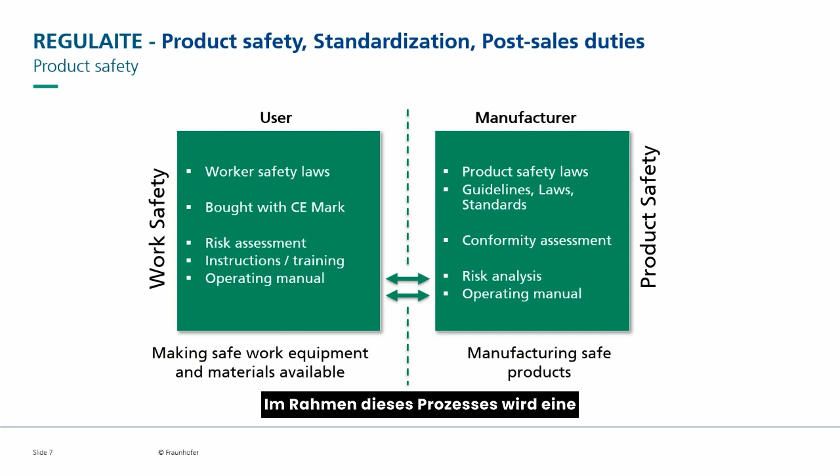Okay. Now when we talk about product safety, we again have the user perspective and the manufacturing perspective. So the manufacturer wants to make sure that their products are safe. So what they have to do is they have to consider different product safety laws, guidelines, and also standards. And they go through this process called a conformity assessment. And as a part of that, they do a risk analysis and they write an operating manual. And in this manual, they are telling the user how they should use it, what they should watch out for, and what some of the possible hazards are.

If you're looking at it from the user side, of course, you need to consider your worker safety laws. You need to make sure that anything that you're buying has the CE mark already affixed to it. So that's really important. If you buy something that doesn't have the CE mark and you use it, that's your problem, that's your liability. And that's something that not everybody knows.

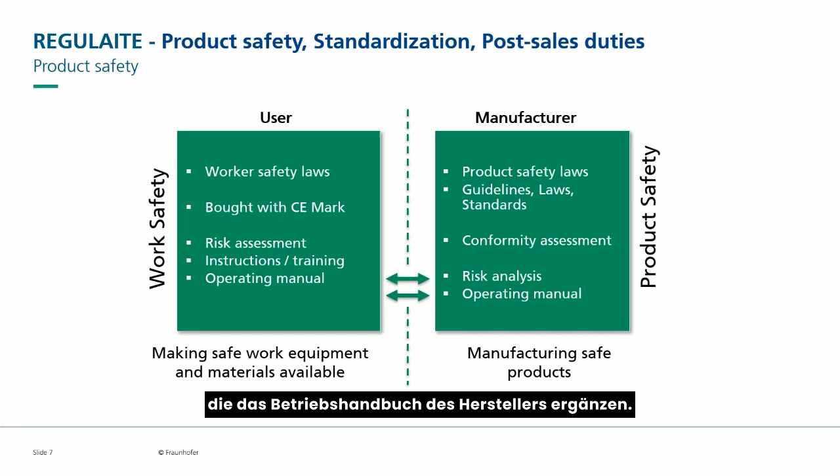So even though the manufacturer has already done their risk analysis, as the user, you're also going to do your own risk assessment because the manufacturer, of course, doesn't know all the details of your application and what's happening in your factory where you're using it. And that's for you as the user, as the manager, to make sure that you're doing this. And as a part of that, what you also do is provide instructions and training materials that go in addition to the operating manual from the manufacturer to your employees. And the idea is that you're making this equipment as safe as possible for your employees. Okay, really important to understand the distinctions there.

When we talk about what are the typical sources of product safety issues, most people consider the top two, which are construction or development errors, meaning that you made some kind of a wrong assumption, you made a bad calculation, you didn't put in some kind of a safeguard in order to cut costs or things like that. And what you can also often consider is a manufacturing defect, like you have some kind of material defect, things that are typically covered in a warranty or in a guarantee.

But in addition to that, what often happens as well is we have faulty instructions. So what you have in the user manual is incomplete, warnings are missing, and what's also an issue is exaggerated advertising promises. And as a final source of error, there's the idea of product monitoring errors. So again, as a manufacturer, it's important for you to actively see how your product is being used on the market. And if something happens, if users are getting injured because of it, you need to either act by yourself or you can wait until somebody within the EU will also contact you and tell you you need to take specific actions to remedy any kinds of things. And the idea here is this is what we all know as like a product recall. And that happens, I think, more often than we really know.

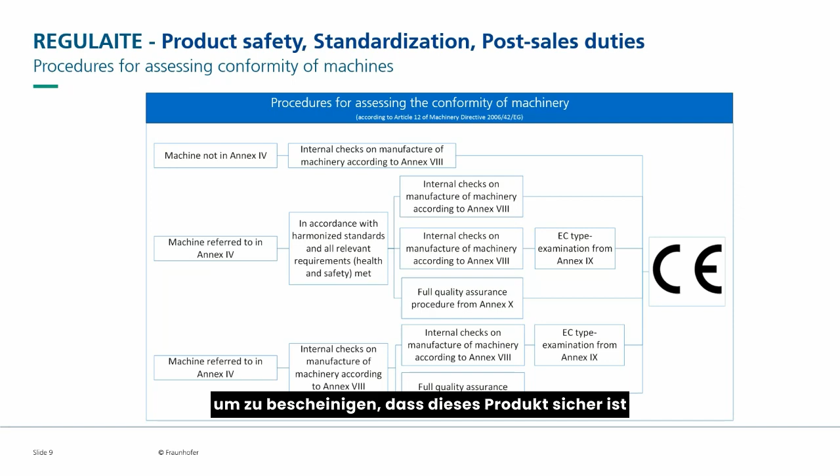So right now, according to Annex 4, robots are things you can do in a self-conformity process. You do not need to go to a notified body, you do not need to pay somebody like TÜV to ensure your robotics application is safe. Of course, you're still allowed to, and if you don't want to take on that responsibility, that's possible for you, but it's not required by the machinery directive.

Okay, so if we take a look now towards the new machinery regulation, it's been a little bit streamlined. Here we have different annexes, and on top, any product not listed in Annex 1 you can do by yourself, what they now call an internal production control, and you can put the CE mark on your product by yourself.

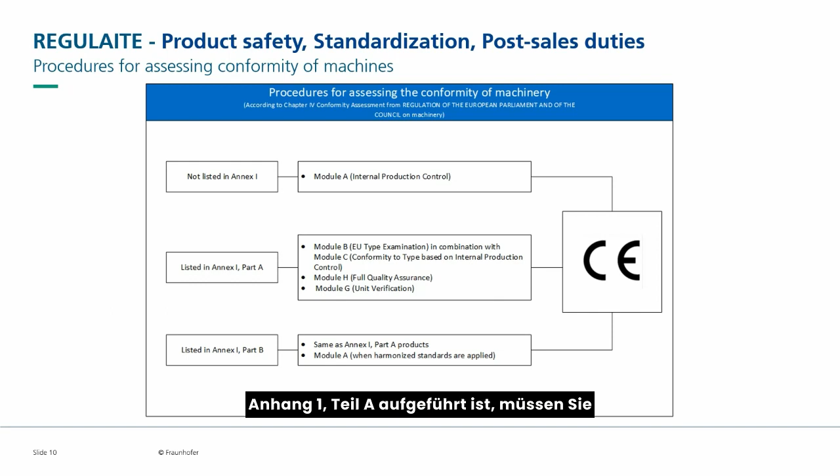However, if you have a product listed in Annex 1 Part A, then you need to go do some other kinds of examinations, known as Module B, an EU type examination where a notified body checks it, or some other kinds of quality assurance mechanisms.

So if we dig deeper into Annex 1 Part A, what we see is there are certain things really closely tied with robotics and with AI. For example, if I have safety components with fully or partially self-evolving behavior that use machine learning approaches, this is something I am not allowed to test myself.

So that's a lot of this idea that I have some kind of AI system that is evolving, that is getting new data, and I'm using that to implement some kind of safety function, like if you see somebody gets closer, stop. I can train this beforehand using AI methods, and say this is a model that's been trained and isn't changing anymore, with no self-evolving behavior over time once it's out on the market. Then it's not part of Annex 1 Part A.

But if I do have that, then it's something I'm not going to be able to put the declaration of conformity on by myself as a manufacturer.

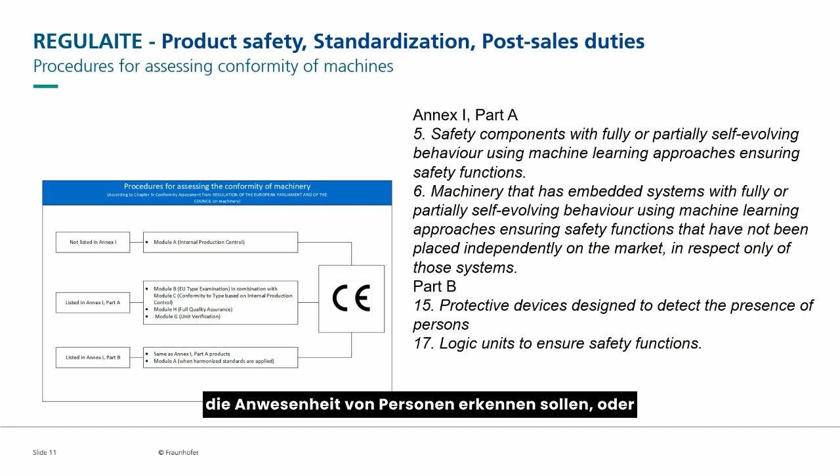Okay, so continuing, we also have machinery with embedded systems with fully or partially self-evolving behavior. And then also if I have protective devices designed to detect the presence of persons, or logic units ensuring safety functions, those are also things I'm not allowed, according to this, to test myself.

So an example is I have a camera system that is a designated safety camera system that uses AI to detect people. These kinds of protective devices are something I'm going to have to get outside expertise and help with to validate before I can put the CE mark on this product.

So again, looking at the issue of product safety, what's often interesting and important is the idea of safeguarding measures. We have what's known as a hierarchy of safeguarding measures that we take, both from the manufacturing perspective and later on down the stream as an end user.

So the idea with the hierarchy of measures is, as a manufacturer and as an end user, I want to start at the top, and only if I'm not able to ensure safety based upon the top level, do I then go down one step lower.

So of course, it's better to have an inherently safe construction. As an example, I have a robot that is limited by its motors, its gearing, its inertia, that even if it were to go at maximum speed and come in contact with me, those contacts would be below the biomechanical thresholds allowed for that specific body part. So no matter what happens, no matter how I control it, it can't hurt you. That's the idea of inherently safe construction.

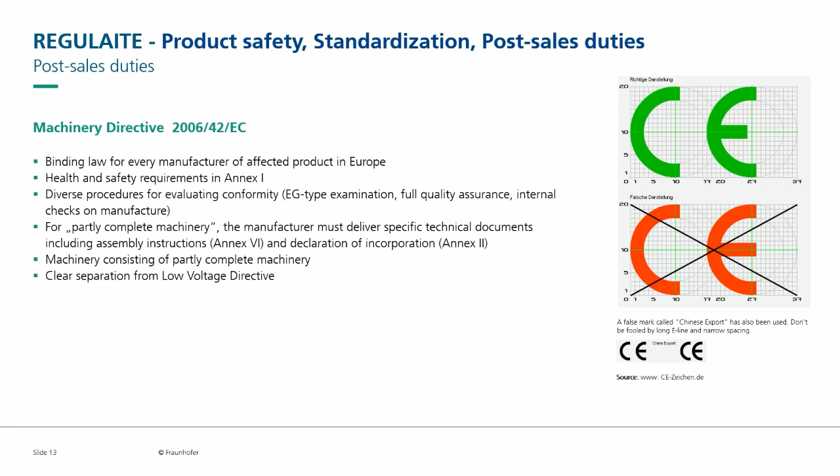Okay, so moving along, what we'd like to talk about now is the risk assessment process as part of the product safety approach. And what does this look like, and what do I have to do? And to give you some tips and some tricks and some ideas about how this process looks.

So as we've already said, the main legislation regarding product safety in Europe is the Machinery Directive, soon to be the Machinery Regulation. We also have the Product Safety Directive. So the question is, how do I really define and how do I know when a product can be considered safe? And this is a really tough question because how do I know the different things that can happen and how do I plan for that?

And the answer is, it's considered safe when the risk assessment and the risk analysis shows that the residual risks that arise from using a specific product in the different ways that the manufacturer or the end user thinks they will be used are as low as possible.

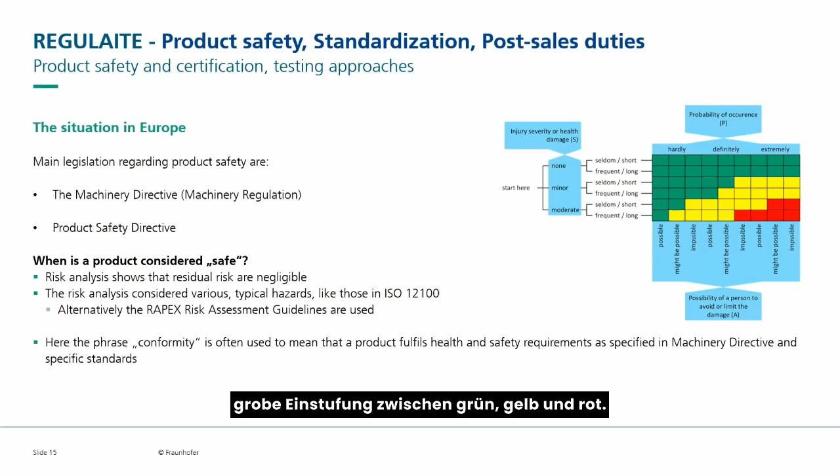We also have what's known as the RAPEX Risk Assessment Guidelines. These are online from the European Commission, and these are something that you can use to guide you through the risk assessment process. We'll jump to the idea of standards.

What is a standard? Are they mandatory? What are the different types of standards that are available that I can use? And what's the difference between a law and a standard?

So here we have a standard, and a standard is all of these things. It's typically an industrial standard, typically made, written by a group of people from the same industry who are focused on a certain application or a certain object, a certain tool. These standards are, of course, up to date, so they have to be updated in a regular interval, at least I think 10 years, and sometimes even more, often within like 5 years. Standards are very specific to an area of use.

As an example, for robotics, there are different standards for robotics being used in healthcare than robotics being used in industrial applications, and also different from robotics being used in consumer applications. Because of this area of use, it becomes very tricky, especially for something like a robotic system where the same hardware can be used for a different application.

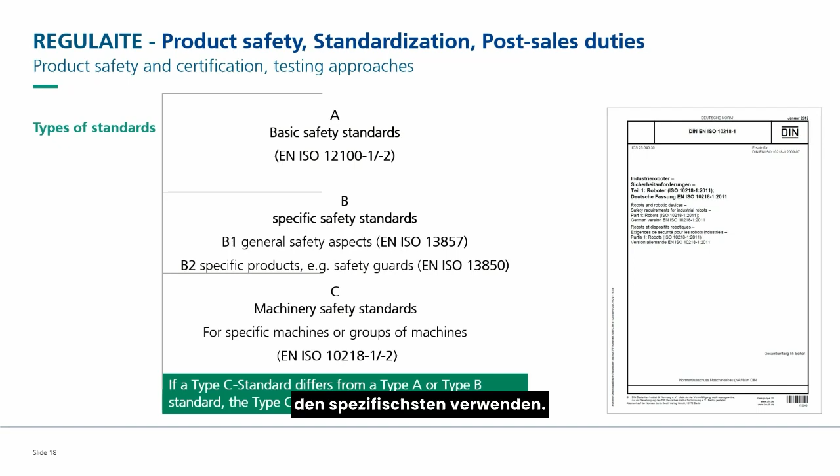We have three different types of standards. They're called A, B, and C. They go from high level, mid-level, and very specific. And when we're talking about standards for a specific application, you're going to want to use the most specific one. So if there's any kind of discrepancies between, for example, a type A and a type C, what's in the type C is the one that is most relevant for your application and has priority.

So I've already talked about this, but I'll say it again. If I use a standard, does it put me on equal footing with the law? No. But if you use a harmonized standard, the burden of proof is on the authorities in case something happens. So it's a pretty good idea to want to use those. Are standards mandatory? No, again, burden of proof. And the final one: what types of standards are there? A, B, and C, where they are very high level and become more specific. If in doubt, use type C standards.

We ask ourselves, how can we reduce the risk by applying this hierarchy of measures? We document that, and then we ask again, after I've done that, are there still any more residual risks? And you keep going through this iterative process, documenting all the things that you've changed in your design.

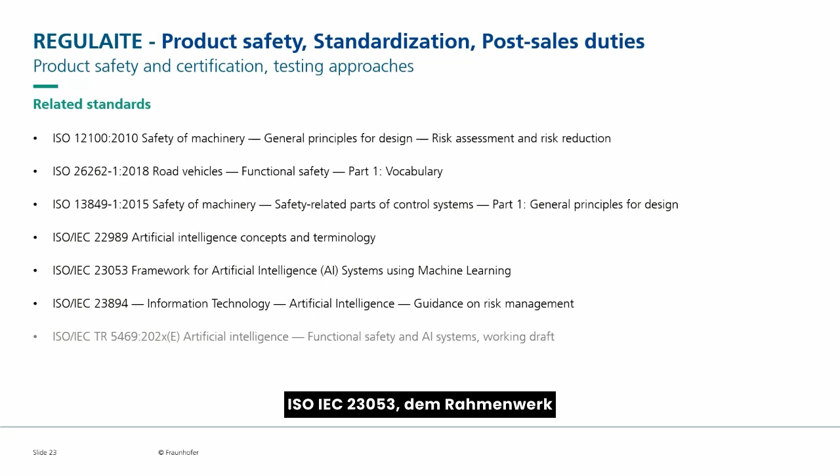So moving on, we also have the ISO IEC 23053, which is the framework for artificial intelligence systems using machine learning. And then we have some other ones that are being developed right now, looking, for example, at guidance on the risk management for AI and looking at functional safety in AI systems.

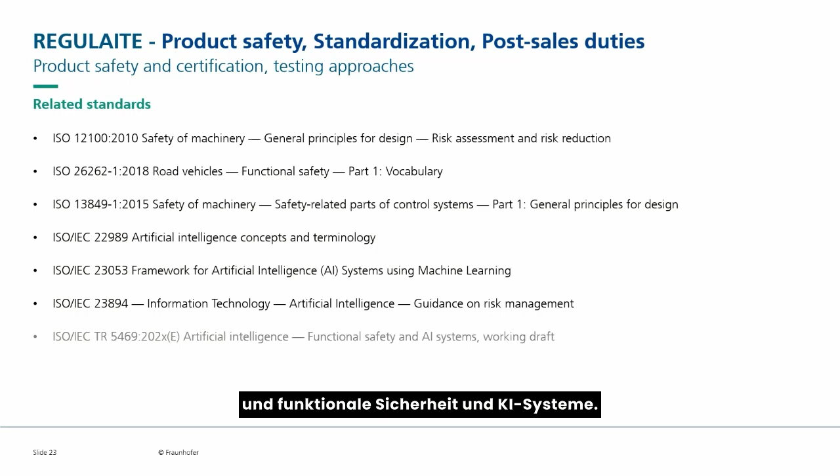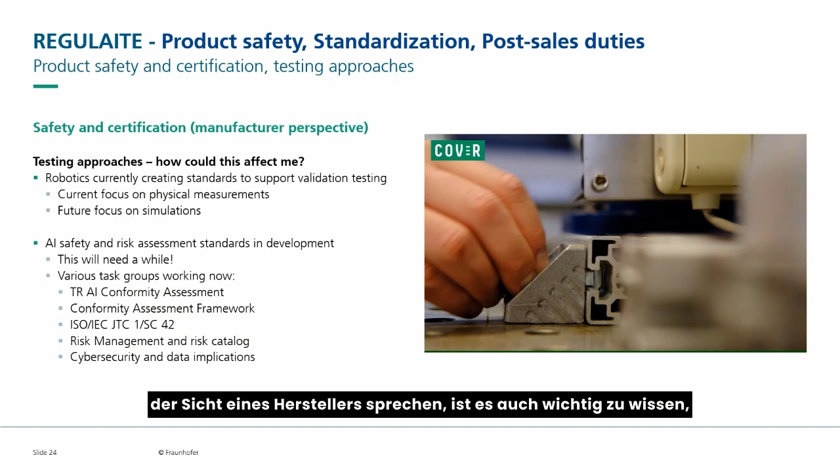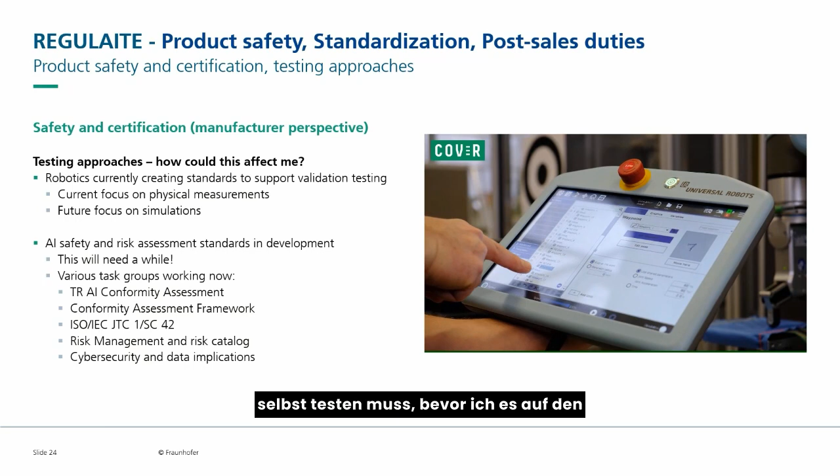Okay, so moving on. When we talk about safety and certification from a manufacturer perspective, it's also important to know that it's part of the CE process, and what's also defined in some of the relevant robotic standards is that I need to do some own testing of my robotic system before I put it on the market.

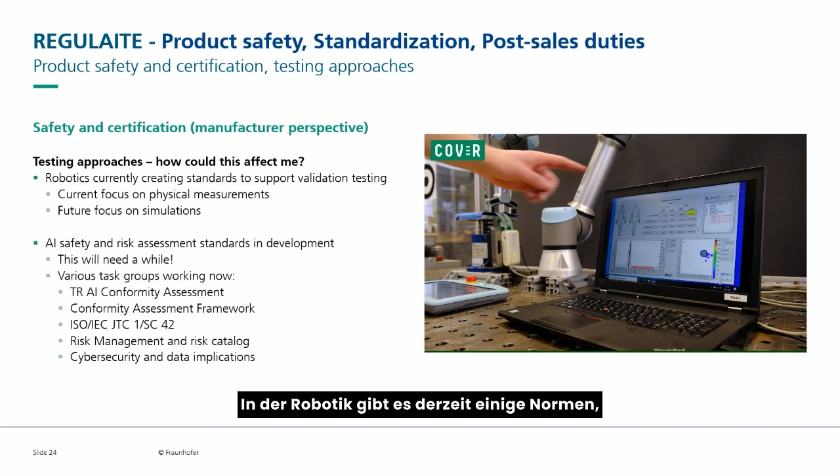If it's used for collaborative applications. And so right now in robotics, there are some standards that are supporting me to guide me through this validation testing, as is what we're seeing in the video. It's how I can measure the forces and the pressures.

The future focus of these standards will be towards simulation, being able to do this through some kind of formal verification, without having to conduct a physical measurement, which from a manufacturer perspective is very time consuming. It's also not really in line with the idea of a flexible robotic system.

Right now, if I have a robot that is power and force limited and could come in contact with a person, I'll need to do force measurements like you saw in the video. And if I change the program in a significant way, I'll need to redo these measurements. That's far from the idea of flexible robotics that change and decide how they work in changing environments. If we have to stop everything and do a new pressure and force measurement in between, that's not really how I think robotics of the future will look.

So that explains this idea within the standardization community, also being pushed by manufacturers, integrators, and end users of robotics: that this is simplified so it can happen online in a computer, in a simulation.

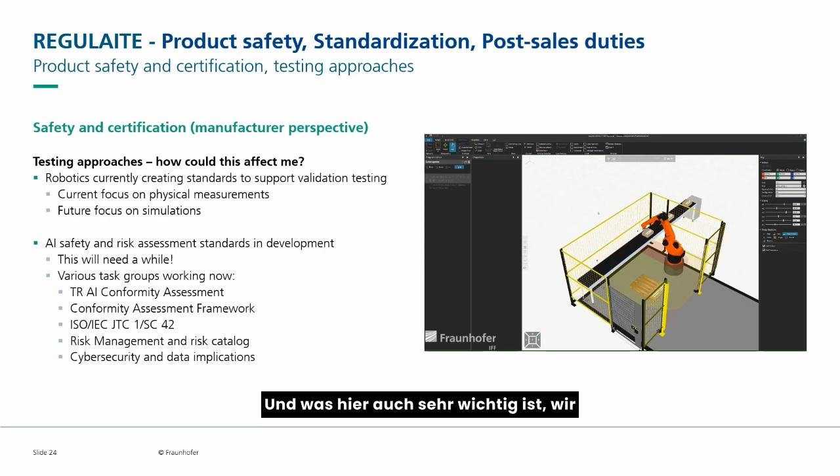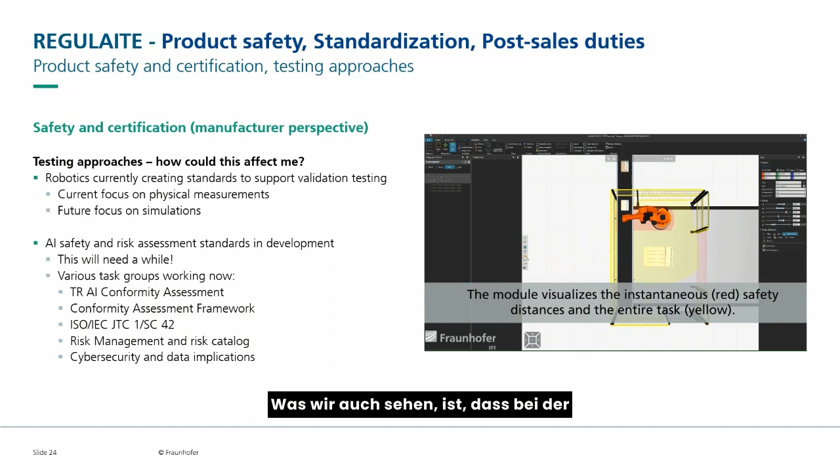What's also really important to realize, here we see in the video an example of how these kinds of safety assessments online could look. What we also see is, in terms of robotics with AI and functional safety, there's also going to be some kind of testing involved.

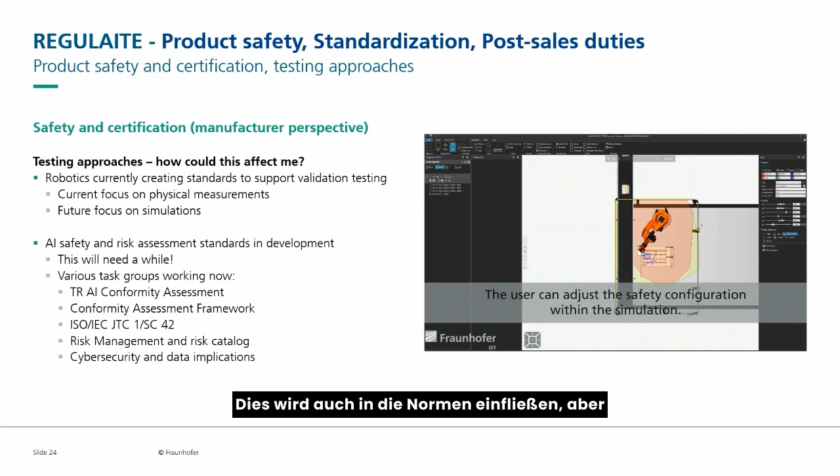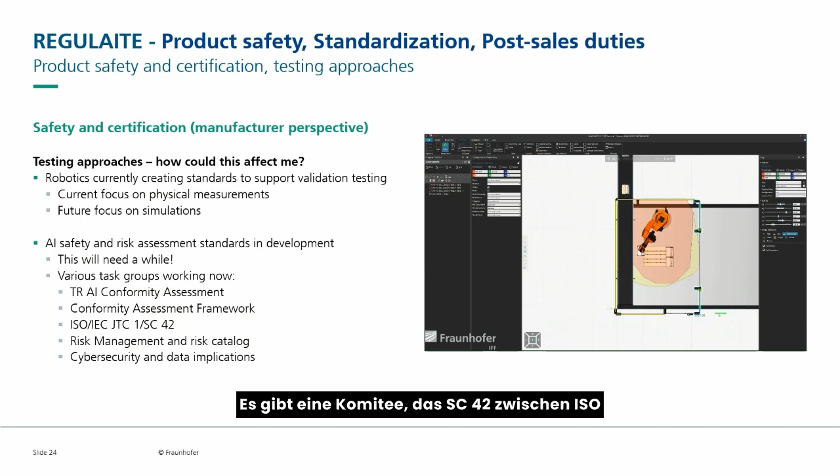This will also be in the standards, but this is going to take a while. The standards communities are working on this right now. We have the joint committee, the SC42, between ISO and IEC, and they're looking at all kinds of different things regarding AI, and this is part of it.

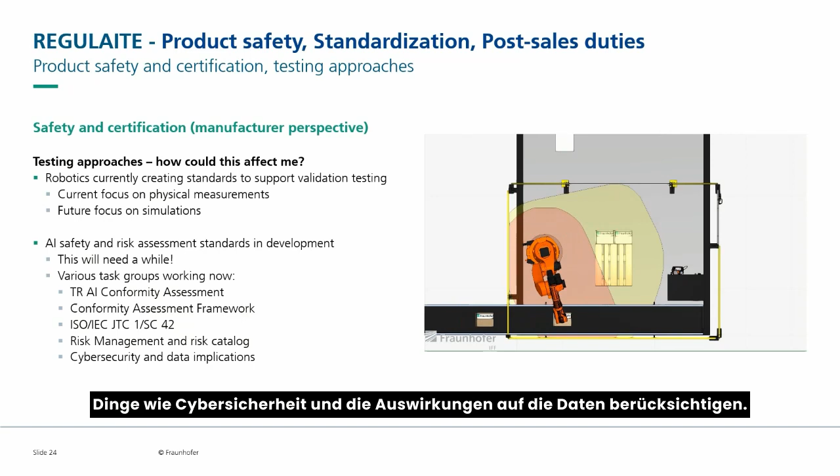Of course, what we also have to consider are things like cybersecurity and these data implications. It's going to be a long path before we have these standards in place, unfortunately.

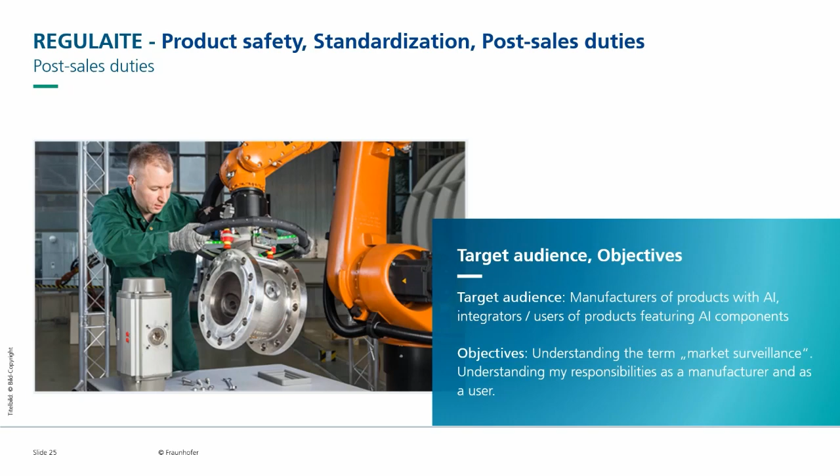Now we're going to look at post-sales duties. As a manufacturer, if you do the CE mark, you need to complete technical documentation, and you need to keep copies of this available, and also keep copies for the different versions of the product you put out on the market from year to year.

As an end user, it's really important you have brochures, descriptions, and data sheets. It's also important and required that you have maintenance plans if the product requires some kind of maintenance. We have product documentation, and this is really important: things like electrical plans, circuit drawings, layouts, and any static calculations involving forces that could be critical.

What's also important is you have the user manual. It has to be in the official language of the country it's being used in. We're all familiar with the thick user manual with 20 different languages. In the new version of the machinery regulation, it's okay for these to be available online, so the idea is we'll reduce the amount of paper being sent around.

What's important is that you keep a copy of the conformity assessment, which basically states which standards you adhere to, the name of the product, when it was put on the market, the address of the manufacturer, and the signature of the person responsible.

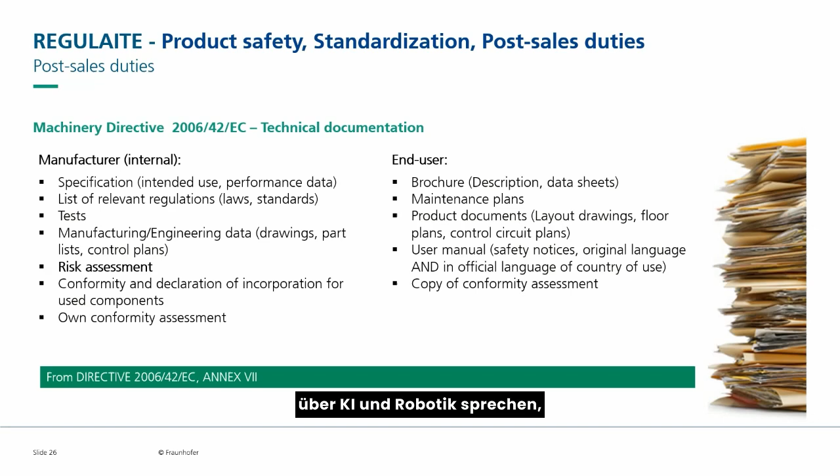Okay, so as a manufacturer, we talk about post-sales duties, we're talking about market surveillance, and this means that you have to put the CE mark on your machine. It means this technical documentation must be available, and if the authorities ask for it, these should be shown to them upon request.

As we saw before, some of these things, like the risk assessment, are for the manufacturer only internally, and they do not need to share this with their customer. But if the authorities come, they do need to share it with them. And there, if they didn't do a diligent job, there will be lots of questions that get asked.

Okay. And as a final step, it's important that as a manufacturer, you could be asked to take corrective actions and remedy any non-compliance that arises within a reasonable time frame.

When we talk about post-sales duties from the user perspective, you need to make sure that the manufacturer provides you with instructions. And if they don't, it's up to you to tell them, hey, there's something wrong here. I'm supposed to get instructions with every product that I'm buying.

And then it's also important for you as a user of these products to conduct your own internal risk assessment and to document that, and to also show that the people who are using your system, if you're the manager, that you've trained them and that you've documented that you've trained them and informed them about the different risks and about the risk mitigation measures and how they should act with this.

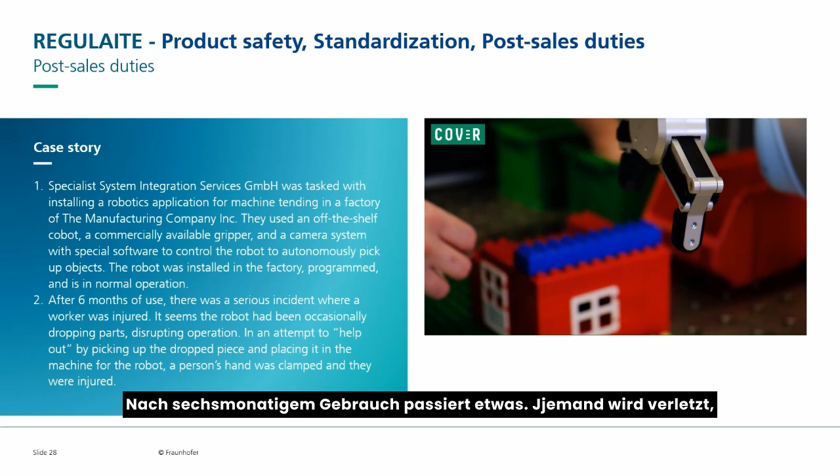After 6 months of use, something happens. Somebody was hurt, and it seems that the robot was dropping parts every once in a while, disrupting operation, and the person was reaching in when they shouldn't have, and they tried to help, let's say, the robot to solve their application without it going into a stop. In doing so, their hand was clamped, and they were injured. Here's an idea in the video of how some kind of a clamping could look. Okay, so what happens next?

The local health and worker authorities come in, and what they're going to want to know is, if you report the accident, then the authorities know about it, and they're going to do some investigation. So they're going to want to see the CE certificate. They're going to want to see the risk assessment documents. And in this case, for example, they'll see in the risk assessment, this is again just an example, that the risk mitigation that was chosen was power and force limiting.

So what they're going to do now is they're going to ask, where are the measurements? Where is the validation measurement that you should have done to prove that the forces when a collision occurs are below this certain threshold? So in this case, let's say they didn't know. So they had thought that relying on the robot's program was enough to say it was programmed to stop at a certain force, and that's enough.

But that's not enough. And that's why the validation measurement is important, because these sort of applications are very complex, and it's not just the robot program itself that can limit the force. There are certain things like the pressure involved, and it's also the geometry of the parts that are being moved around that play a large role here.

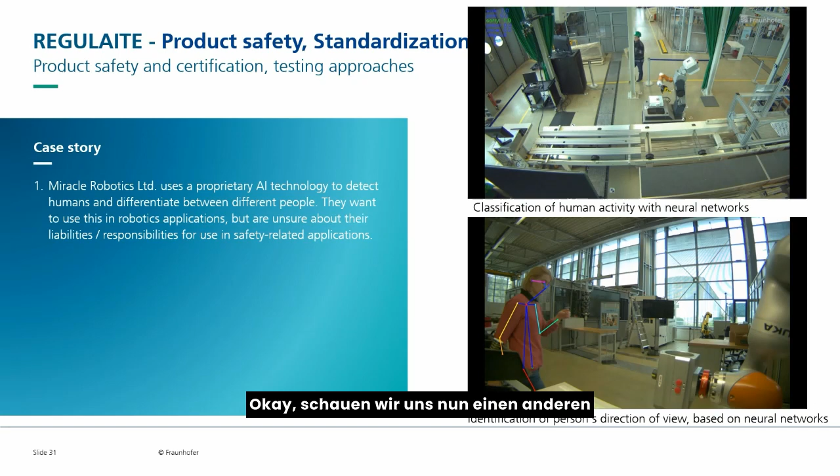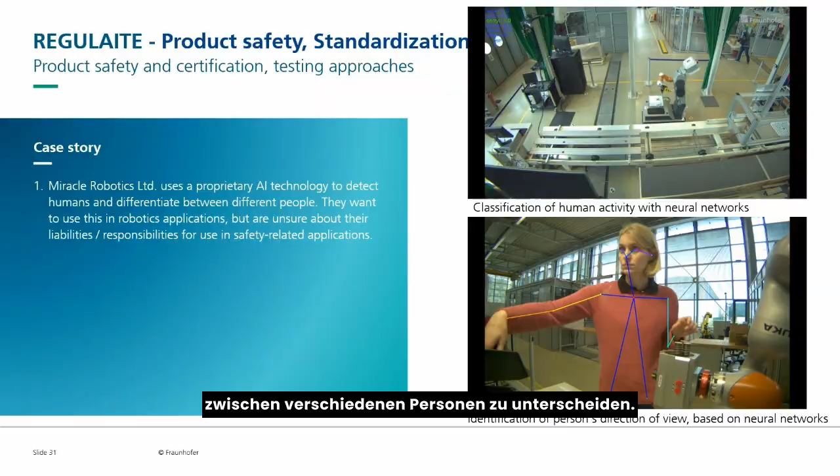Okay, so moving forward then, let's look at another use case where we have a company that's using AI. We call them Miracle Robotics Limited, and they're using a proprietary AI technology to detect humans and to differentiate between different people. And they want to use this in robotics applications, but they're not quite sure what are the liabilities, what are their responsibilities when they're using this in a safety-related application. So let's take a look.

What do we learn today? We see that if we're talking about safety-related applications, this is going to fall under Annex 1, Part A for CE marking, according to the new regulation. So that's one thing to consider, that we're going to need to go to a notified body, and they're going to have to do this process with us in terms of testing these systems. The next question that we're going to ask, of course, is the application self-evolving or not? Because that's, I think, also a big part of whether it falls under Annex 1 or not.

And then it's important to consider the risk assessment. So what are the risks that have been considered? What's the hierarchy of mitigation measures that have been applied? And then also, again, what is the intended use for humans, and how can this foreseeably be misused? And that's also an important part of the risk assessment process.

And as a final step, it's important to understand what happens if something malfunctions. And here it's important to go technically along the entire technological tool chain to say, okay, from my computer, from my camera system that I'm using, how many different cameras do I have? Are they redundant? Can I check, for example, and safeguard that if one camera isn't working but the other one still is, that they can check each other and things like that. So what are the layers of safety-related technologies that are involved? And those are some of the considerations you're going to have to do as a manufacturer.

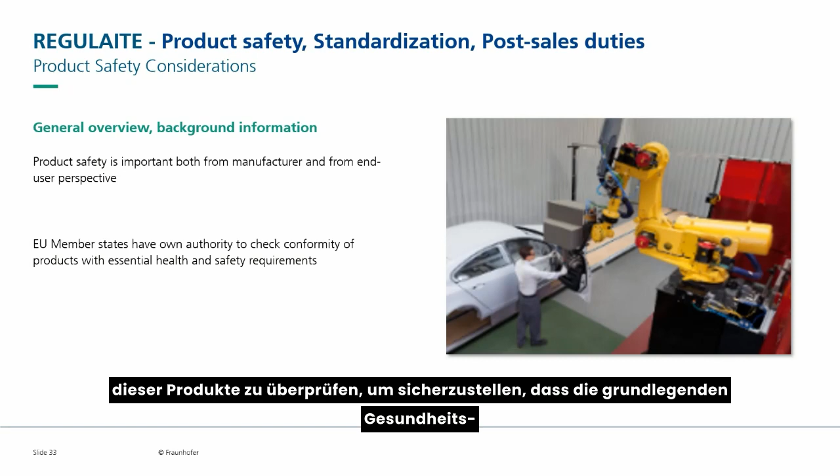Okay, so tying it all together, as a general overview, product safety is important both from the manufacturer perspective and from the end user perspective. Within the EU, it's important to know that the member states have their own authority to check conformity of these products to ensure that the essential health and safety requirements have been fulfilled. As a manufacturer, you need to be aware of your obligations to maintain documentation. And as a user, you also need to be aware that you need to ask for these, make sure that you have them, and that you also do your own internal risk assessment.